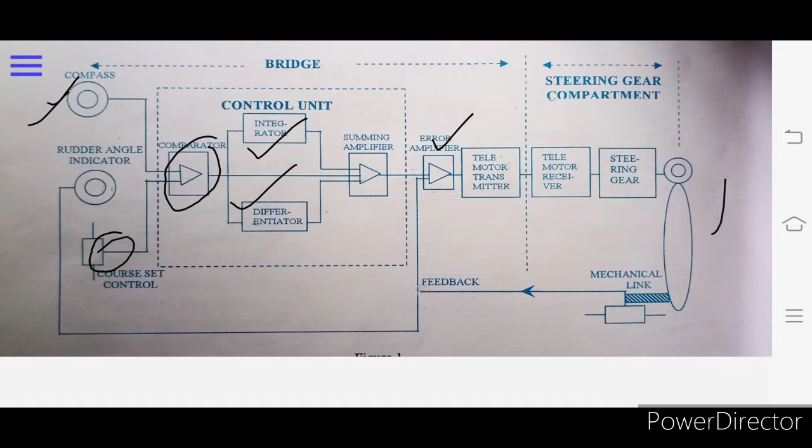After this it goes to a summing amplifier, which amplifies the signal, and further to an error amplifier—if there is any error, it calculates that particular error and removes it. Then it goes to a telemotor transmitter, which collects all the incoming signals and sends them to a telemotor receiver. The telemotor receiver receives the signal and it goes to the steering gear—this is a control unit, and from this our steering gear operates, meaning our rudder operates. Here, feedback is given to that.

Feedback is coming from this area and it shows on our rudder angle indicator that is on the bridge. From there we see whatever set course we are doing—whether it is showing correctly or not, meaning whether our rudder is doing the same course which we have given, shown by the rudder indicator. If there is any error, again we will show it from our course on the compass.

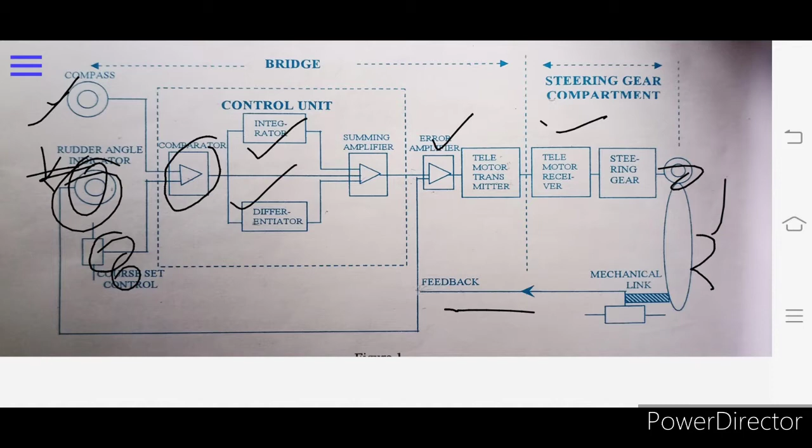This will have a same thing almost, whether the rudder indicator is showing 5 degree, 10 degree, or whatever the setting we are doing. As per that we will do it, and if there is any error, it will be sent to the error amplifier, and again the entire process will take place, and hence this autopilot system works.

So well mariners, as you have seen how the block diagram, means how the autopilot system works, now let's have a detailed view on its control unit, that is how the PID control works. Let's begin with the detail of the control unit.

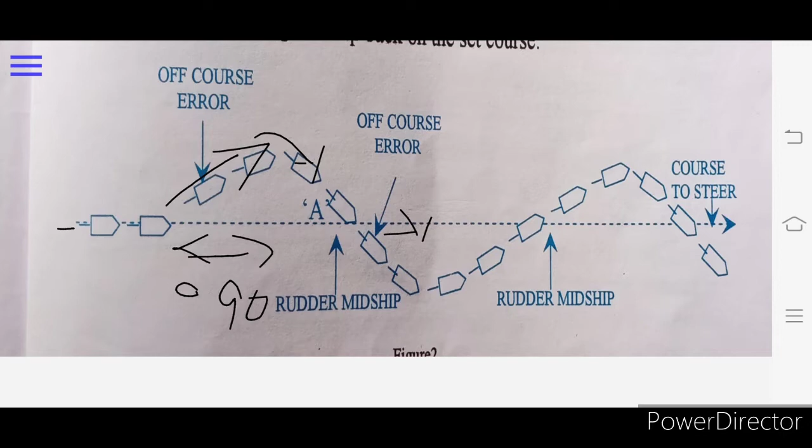After crossing our set course, again it will observe that we are deflected from the set course, and again it will give rudder correction as per whatever amount we have moved from the set course, and it will continue doing a zigzag course. This is proportional control, how the ship's autopilot system tries to keep the vessel on the set course.

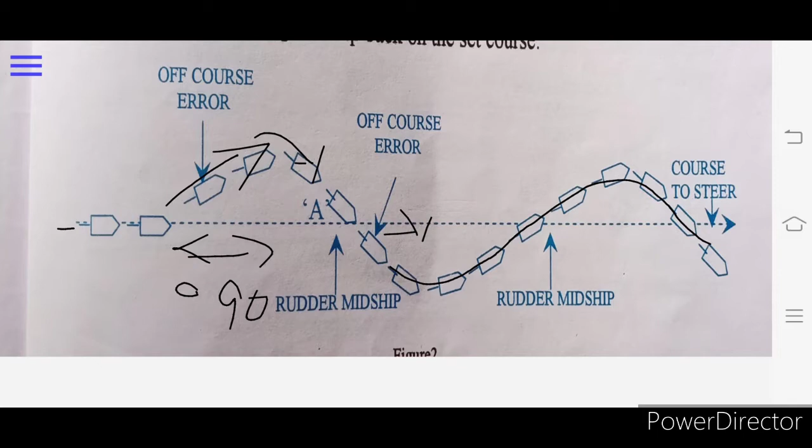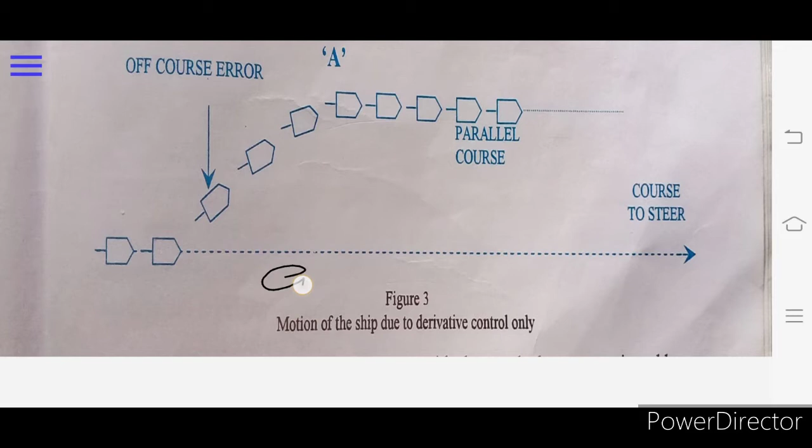Now, this is our derivative control. Let me explain how it works. We are steering a course of 090 degrees, and due to wind, sea, current, or any other cause, our ship has deflected from the set course.

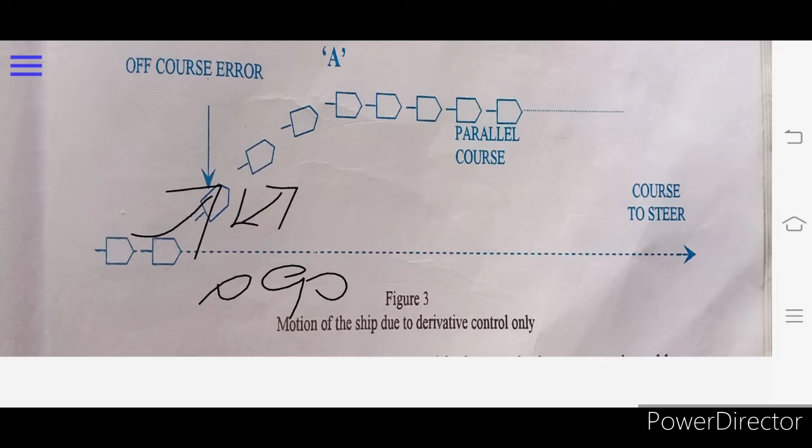So now the ship has been deflected. After seeing this, our autopilot will give a command to do a course of 090. The rudder will receive this command and deflect in such a way that our ship will start doing 090, almost parallel to our previous set course, but from a different position.

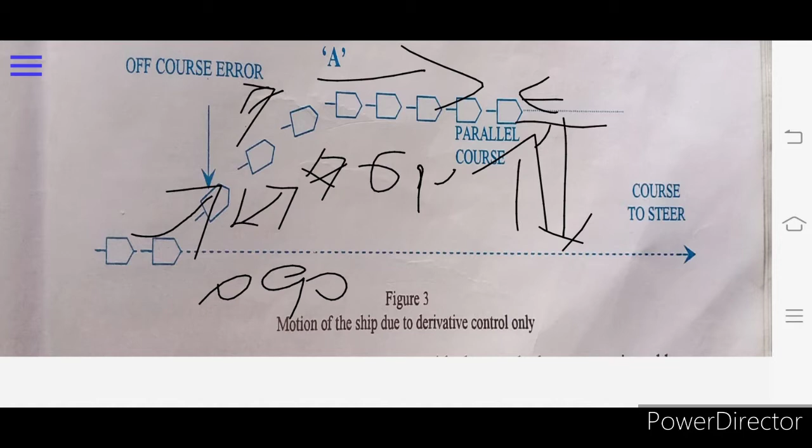So well mariners, I have shown you the proportional control and the derivative control. Now let's talk about the integral control. The integral control also works on the sensor.

So well, these are the normal views. Separately we have seen what is integral, what is derivative, and what is proportional. Now let's have a combined view of the PID control, how when we combine all these different things, this works, meaning how the autopilot finally functions.

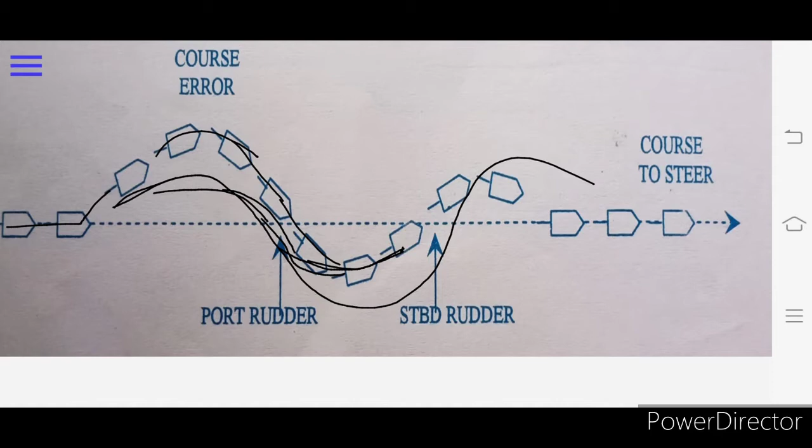As per the proportional control we have to do the same zigzag motion, but due to the derivative control, it tries to make the vessel parallel to this course, parallel to the previous course, but the vessel is still away from the set course.

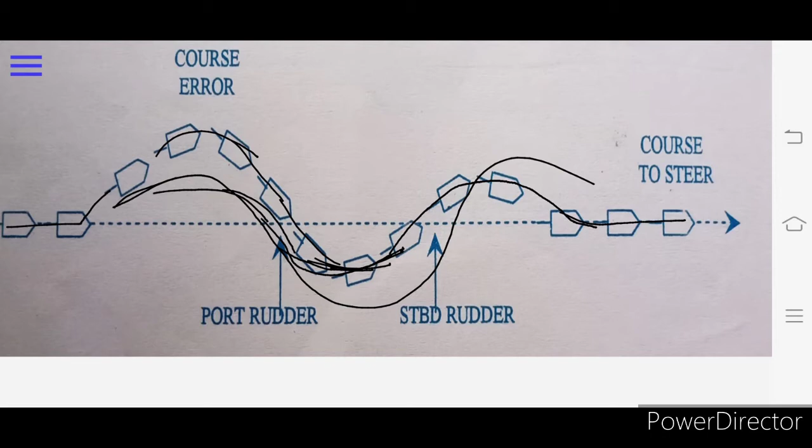Hope this is clear to you, it's a really important question for written and oral exams, they often ask these questions. I hope the things we discussed are clear to you guys.

Now let's have a look at the controls on the autopilot panel. What are the controls on the autopilot panel, how do we use them, and why are they given? The first is the course selector knob. From the name it's clear - the course selector knob is used to give a command to the rudder to set a course.

Now rudder control. This control determines the amount of rudder to be used to correct the slightest amount of deviation of the equipment due to external causes.

Now counter rudder. What is counter rudder? This control determines the amount of counter action by the rudder used to steady the ship at a certain course when the vessel is deviating from the set course due to wind, sea, and other causes. We give a command, we have a knob, and we set it to 5 degrees or 10 degrees. Whenever we are deviating from the course, the rudder will deflect by 5 or 10 degrees to maintain our course.

So yaw - what is yaw? The setting of the yaw control depends upon the wind and weather conditions and their effect on the course-keeping ability of the ship. In bad weather with strong wind and rough sea, a higher value should be selected, while in calm weather a lower value is selected.

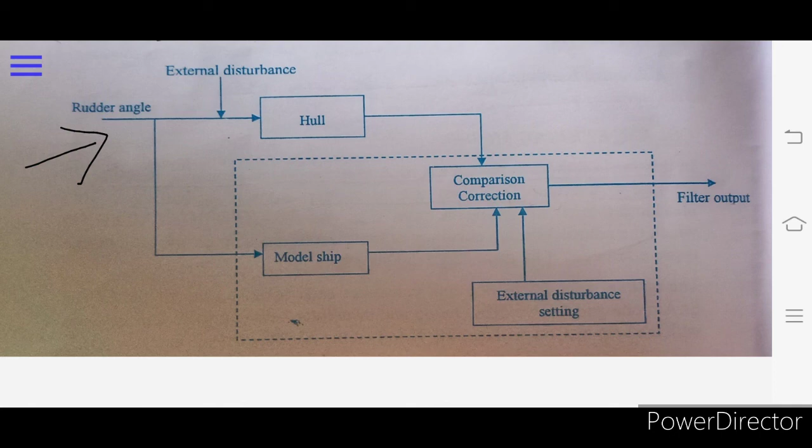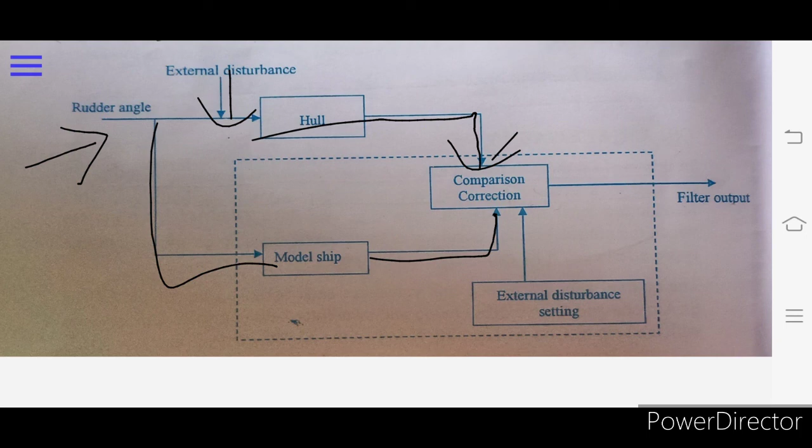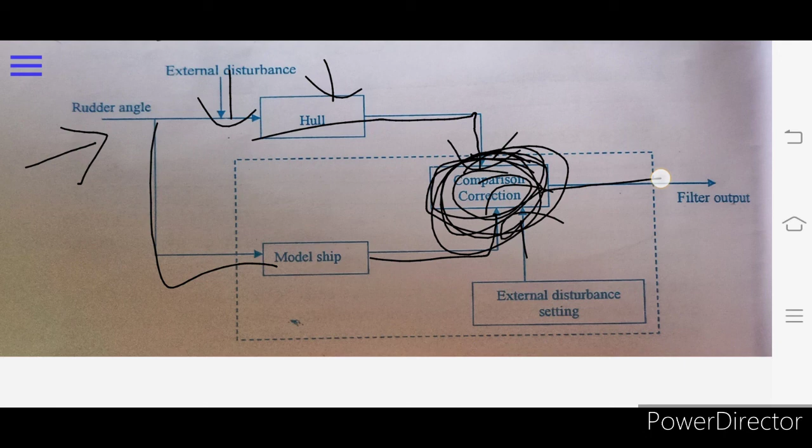How does it work as per the yawing feature? Whatever the rudder angle is doing, and the external disturbance due to wind, heavy wind or bad weather, this is calculated and given to a hull. After that it goes to a comparison correction - it compares, based on the model of the ship, whatever rudder angle is given, and its signal goes to a comparison unit along with the external disturbance settings we put from the panel, such as rudder control, rudder limit, course alarm - everything is calculated. It goes to a comparison unit and compares what we are doing, what we want to do, and what the current is doing, meaning what it is pushing. The entire thing is compared and correction is applied, coming to a filter output which gives an output, and this again goes to the rudder, giving the command to the rudder. After calculating all this, the rudder will act accordingly to maintain the steered course we want.

Hope guys this video is much useful to you and you will like it.